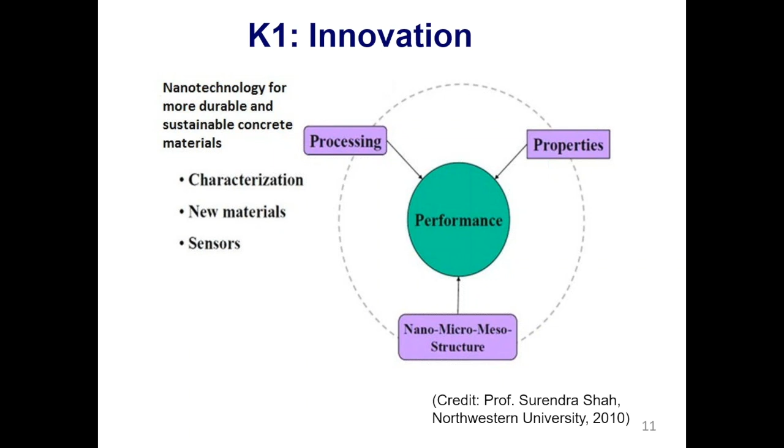So it's a civil engineering subject, but it certainly could use a lot of knowledge from other disciplines to shed new light on this subject.

Now, moving on to the second key element of high quality technical writing, I would say it's engaging. Because in any sort of writing, we're trying to communicate the message effectively, so it's really important to adopt the right attitude. Basically, we're having a conversation with our reader, almost one-on-one. And everything we do in the technical writing is to make the job of the reader easier.

That's why later I'll talk about the use of topic sentences, the importance of flow of logic, and all those things. In today's world, people won't have the time to read every sentence of your paragraph before they figure out what's going on. It's very unlikely they'll read every sentence in your article, but first they'll scan through it. So to make their job easier, you should have a very clear structure of telling your story.

Now, tell an engaging story with cohesive structure. That's also important. What I mean is that your introduction section should always correspond with your key findings, for one thing. I've seen a lot of papers in the introduction start with something really large scale, like national economy level, and then talk about many different questions or doubts or challenges.

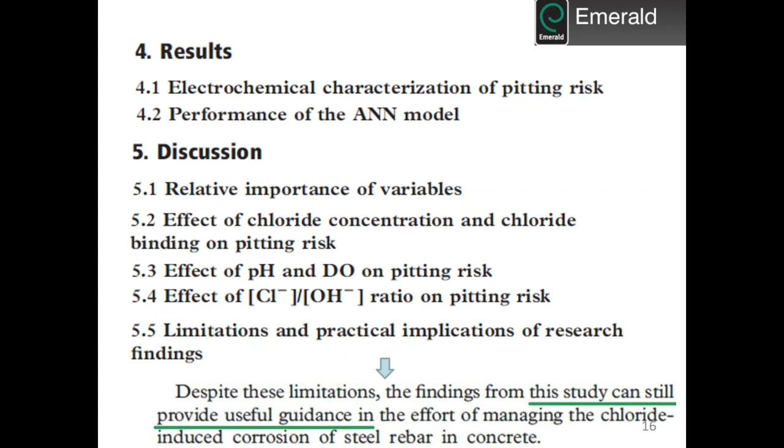So that's a cohesive structure. Now, talking about the abstract, which we mentioned a little earlier.

Some journals actually have a set structure—they specify what you're supposed to put in the abstract, which is really helpful. Again, oftentimes people forget to talk much about the limitations of the work or the practical implications. They just assume that by the end of their study, the problem is solved. Well, there's always room for improvement—keep that in mind.

Now, the third keyword I would say is hypothesis, because there are three types of research: fundamental research, applied research, and development research. For the fundamental research, it's also considered hypothesis-driven, and it intends to answer the question of why.

For instance, we can raise a hypothesis like nanomaterials. We can be very specific: nanosilica serves not only as a nanosize filler in the concrete, but also effectively alters the chemical composition of hydrated cement paste. That's a hypothesis.

So then in order to test that hypothesis, we can design experiments, and by the end of the study we should be able to test whether the hypothesis was true or false. Either way, you're contributing to the knowledge base and advancing knowledge in that field. This slide is a little old now, but today this hypothesis has been tested mostly true.

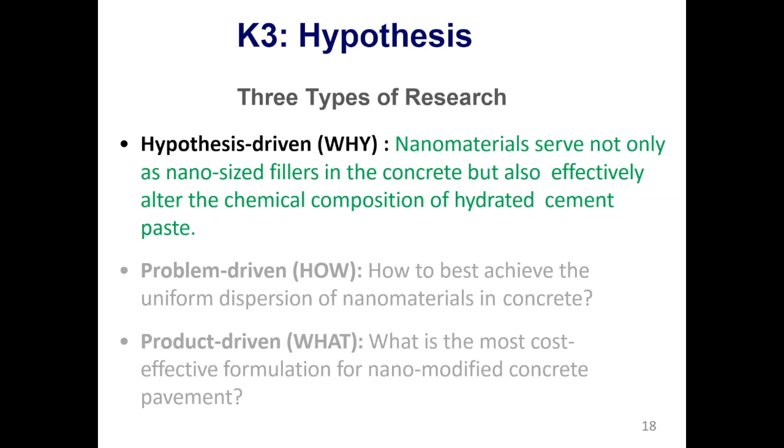Yet another type is development research or product-driven research. It tends to answer the question of what - for instance, what is the most cost-effective formulation for nanomodified concrete pavement for a certain environment? Since we're focusing on high-quality technical writing, especially in academia, I'd say those tend to focus on fundamental research, at least hypothesis-driven, answering at least partially the question of why.

Now, how do we propose a hypothesis? One way is induction. Induction basically starts from observation and eventually ends up with a theory.

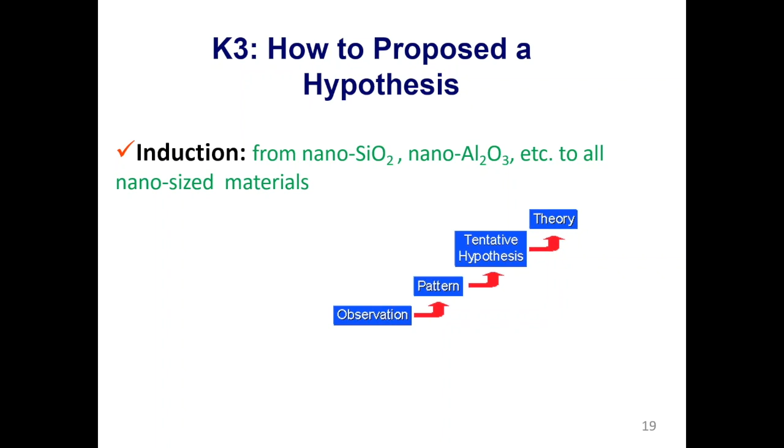For instance, we may observe that the use of nanosilica to replace Portland cement by 1% in concrete tends to significantly improve the strength and durability of the concrete. Maybe other studies look at nano alumina or other nanomaterials, and then we may reach a hypothesis at the theory level - maybe it's the nano size effect. Then we can use that to propose new studies looking at other types of nanomaterials. That's one way to propose a hypothesis: induction.

Another way is deduction. You start from a theory and move on to specific examples. For instance, we know that electrons are pretty important for the health of bacteria - they use electrons as a way of getting energy to survive and thrive. So for the bacteria to grow as a community, also known as a biofilm, some of the biofilms can deposit biominerals.

One mechanism used recently in civil engineering a lot is MICP, microbial-induced carbonate precipitation. Knowing that MICP is useful, maybe we want to better control or regulate how MICP works in our field. So if we start from the theory - electrons are important for the health of biofilms - maybe we can use some sort of external pulse electric field with certain frequency to control how the biofilms survive or thrive. That's a way to come up with a hypothesis by deduction.

A third way is extrapolation. For instance, we had a project which stemmed from this hypothesis: maybe some sort of nano electrochemical treatment will help us get the water out of soil and enhance the strength properties of the soil, and at the same time reinforce it with some nano deposition.

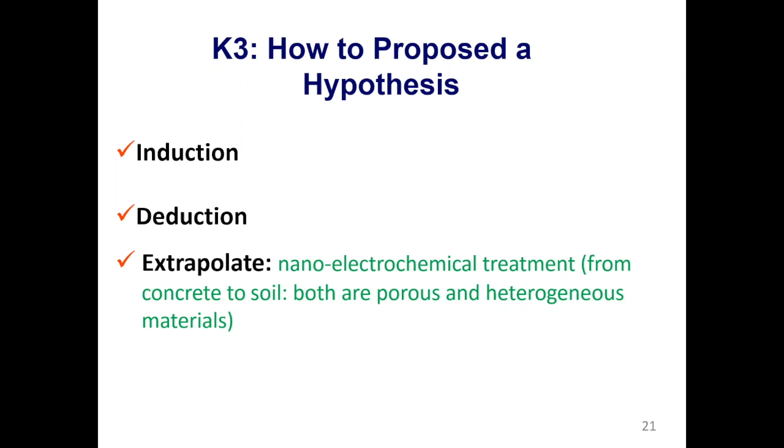This started from a different study in the concrete field where they made this successful by applying electric field to remove water out of concrete and inject charged nanoparticles - the concrete became a better microstructure and more durable. So with that in mind, we were trying to extrapolate from concrete to soil because they're both highly heterogeneous and porous materials. That's yet another way to cross sub-disciplines, from concrete to soil, for instance - something to think about.

Now, hypothesis is pretty important. In some papers - this is one of my own papers - we actually talk about hypothesis directly. For instance, we say nanotechnology has demonstrated many substantial benefits, and yet the mechanism of modification, especially by nano titanium dioxide, remained unclear, at least at that moment, in 2013.

So we say one hypothesis to test is mixing this nanoparticle would not only lead to denser paste, but also alter the morphology and chemical composition of the hydration products. This is a very clearly stated, articulated hypothesis. Then we justify why we designed the work plan in such a way, and by the end of the study we were able to tell, yes, the hypothesis was true.

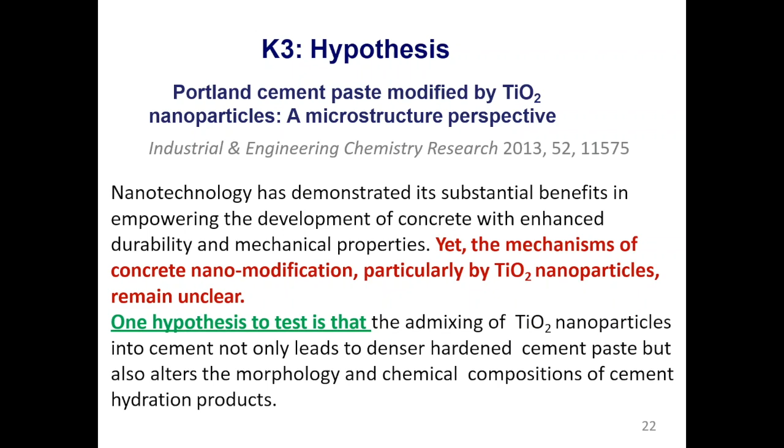Again, in other papers, like the one I mentioned about manipulation of biofilms through external electric field, because we are trying to regulate the transport of electrons, we also state - this was a paper published in Environmental Science and Technology about 12 years ago - it was hypothesized that polarizing the substrate material will alter the ennoblement process. And then to test the hypothesis, we applied this. So it was very clearly stated we had a hypothesis, and at the end of the study, we'll find out whether or not the hypothesis was true.

So that was our third key element, hypothesis. The fourth one is logic, the flow of logic between paragraphs. The worst kind of writing is something that even an English editor could not fix because it's convoluted logic. Sometimes the logic jumps around just like a very artistic movie, but that's not how we do scientific communication. The logic should be very straightforward and easy to follow.

Now that's why a little bit later we'll talk about the importance of topic sentences. So if, for instance, we have topic sentences for each paragraph, we read from topic sentence to topic sentence. If I only have 15 minutes or 10 minutes to scan through this article, I should be able to follow very quickly what the article is about, what's the innovation.

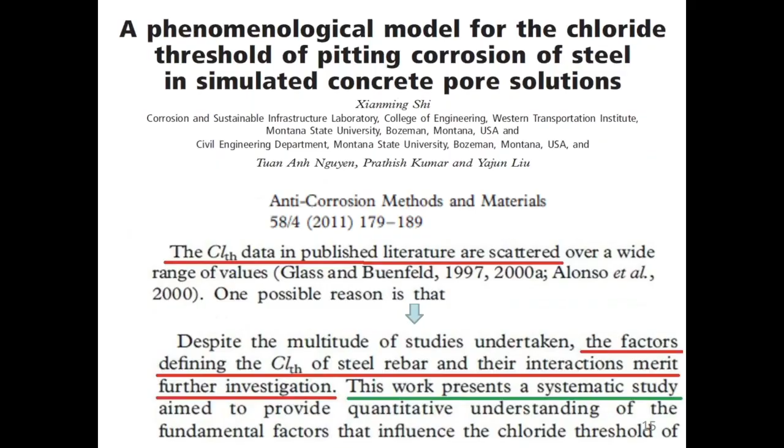Xianming, I found a very good question. Oh, I lost the question. It's about the...

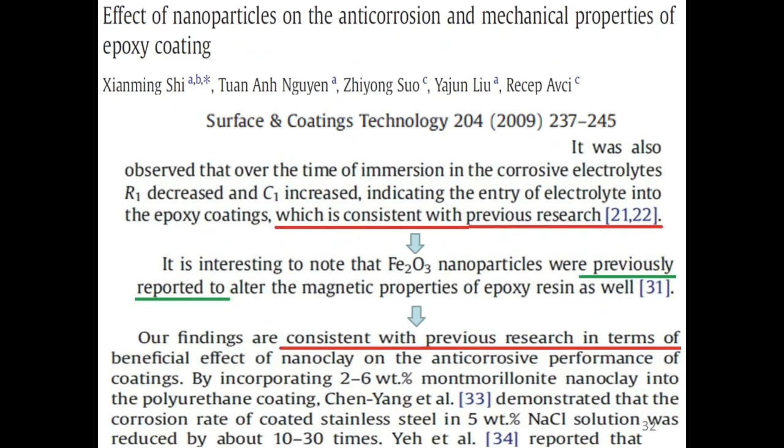In a review paper, we represent works of other authors. What is the best way to write a review paper without plagiarism? I think you certainly have experience. Sorry, could you repeat that question? What is the best way to write a review paper without plagiarism?

Because in a review paper, we have to represent works from others. Again, just keep in mind the purpose of the review paper, because there are so many review papers out there. My personal opinion is that a good review paper should introduce the subject to an unfamiliar engineer or scientist very quickly. So if I read your review paper, I don't have to look at the other 100 papers, but I already have a very good handle on the overall overview of the landscape, as if I'm standing on top of the mountain - why the subject was important, where things have been, where things are going, where things are missing, where things are going next.

To avoid plagiarism, of course, like I said, my procedure for my students usually is to ask them to come up with a list of references by keyword searching in Google Scholar and other databases, and I will look at that list because some are from less credible sources. I will discard them, and some they will also target certain journals to do a more in-depth search.

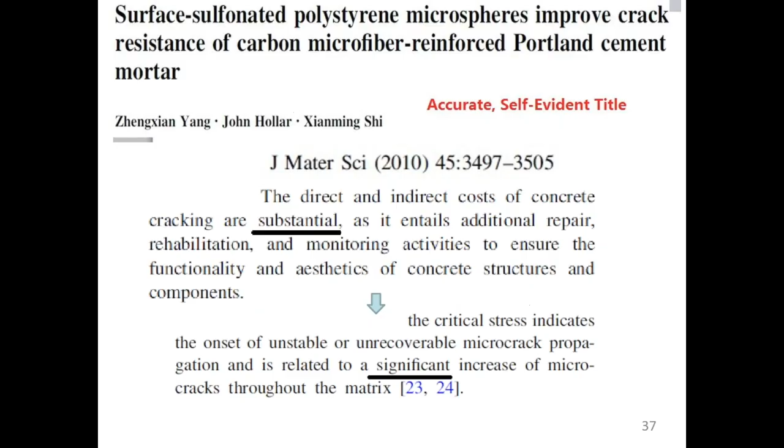But there's a last question: when do I know I have researched enough to start writing? Good question. Actually, when you do a literature search for a journal article, you do it at different times, several times - before you select the topic, to make sure you are not reinventing the wheel.

Also, when you're doing it, you run into difficulty, you may try different keywords, or come up with new ideas to search for a test method, for instance. And when you're writing the paper, describing your results, when you get into discussion, you need to research again - so research is all about searching again, by definition. You search again to make sure you can compare your results with others and discuss it. Don't just talk about your own story, put that into the bigger context. I hope that clarifies.